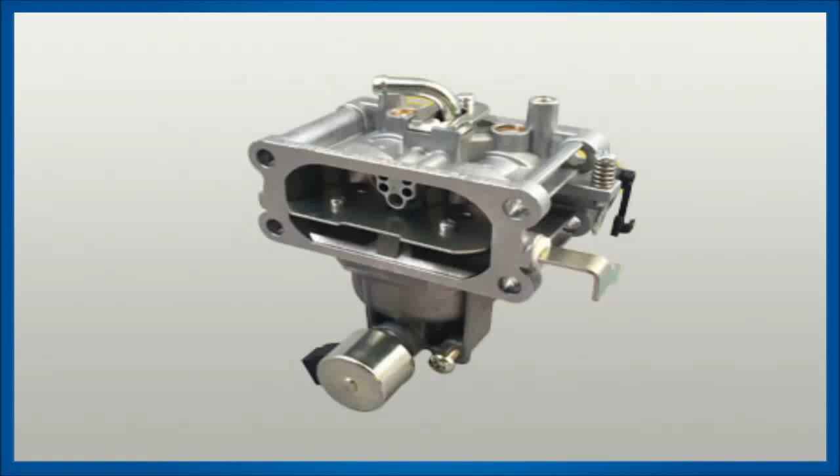Have you been looking for a way to service the Briggs & Stratton V-twin 2-barrel Nikki carburetor when the jet O-rings fail without having to buy new jets? Follow along and we'll show you how it's done with the new O-ring service kit that will save you time and money. At the end of this presentation, there'll be information on ordering the kit.

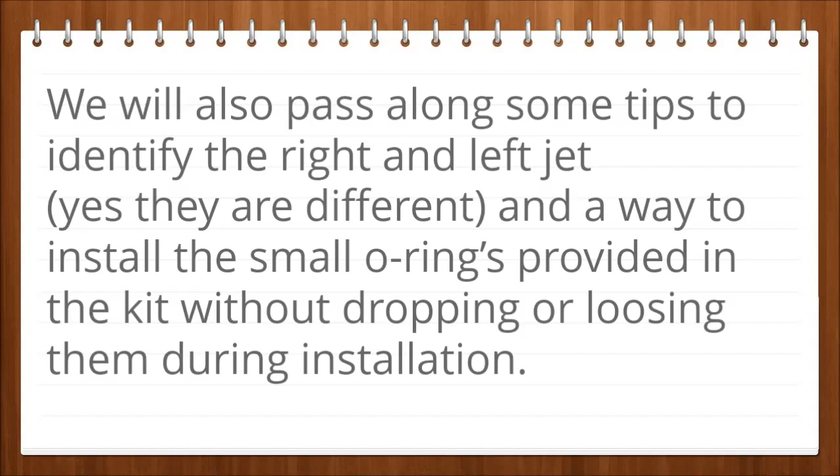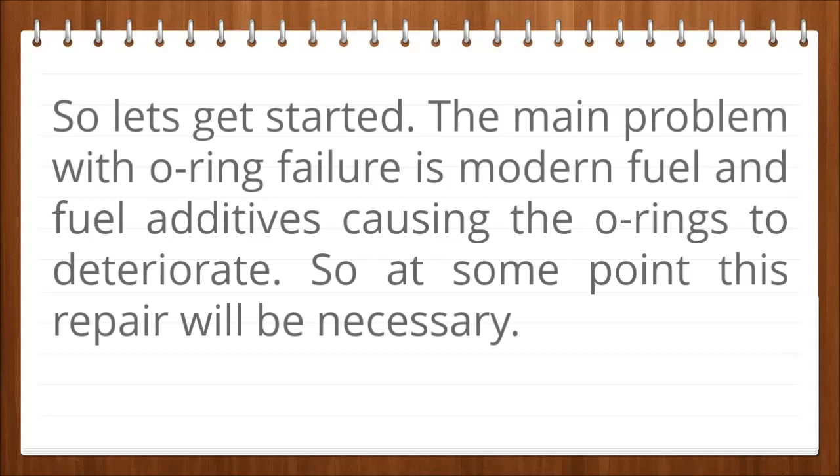We'll also pass along some tips to identify the right and left jet, yes, they are different, and a way to install the small O-rings provided in the kit without dropping or losing them during installation. So, let's get started. The main problem with O-ring failure is modern fuel and fuel additives, causing the O-rings to deteriorate. So at some point, this repair will be necessary.

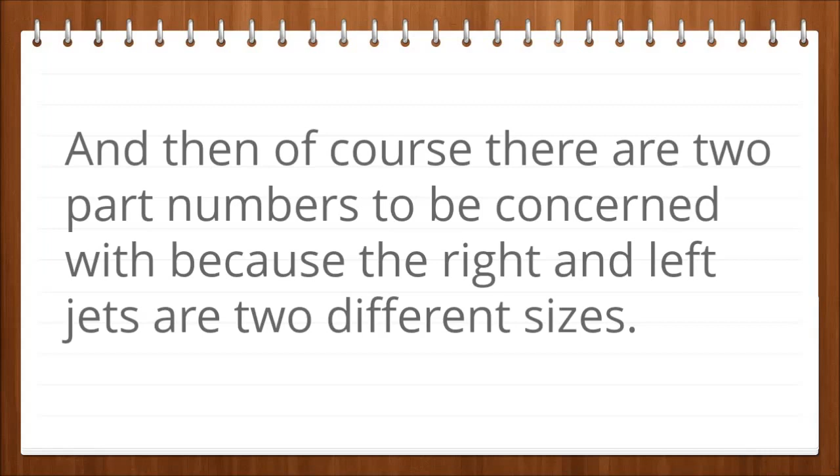Repairs are being done now by ordering new jets, which is costly and for the most part unnecessary. If you're a small engine shop, the correct jet may be out of stock from your main supplier, requiring you to order from more than one source, thus increasing turnaround time for you and the customer, and increasing job costs due to added shipping. And then, of course, there are two part numbers to be concerned with, because the right and left jets are two different sizes.

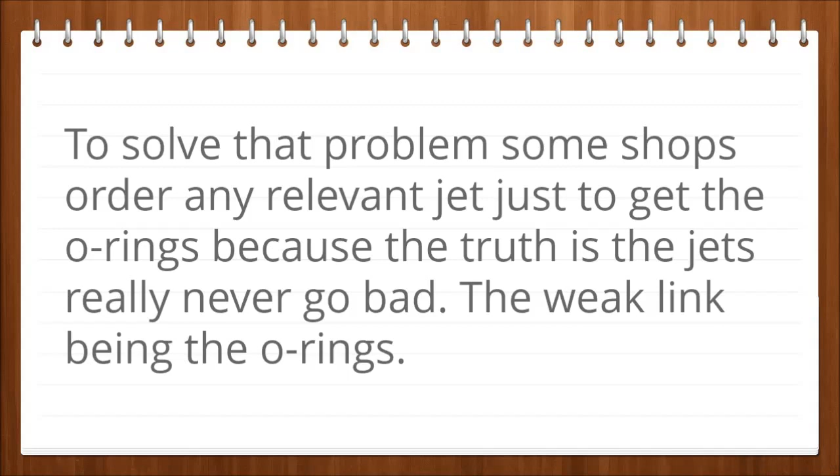To solve that problem, some shops order any relevant jet just to get the O-rings, because the truth is, the jets really never go bad, the weak link being the O-rings. At last, an O-ring service kit is available. It consists of 2 jet O-rings and a fuel bowl gasket, making this repair job a snap.

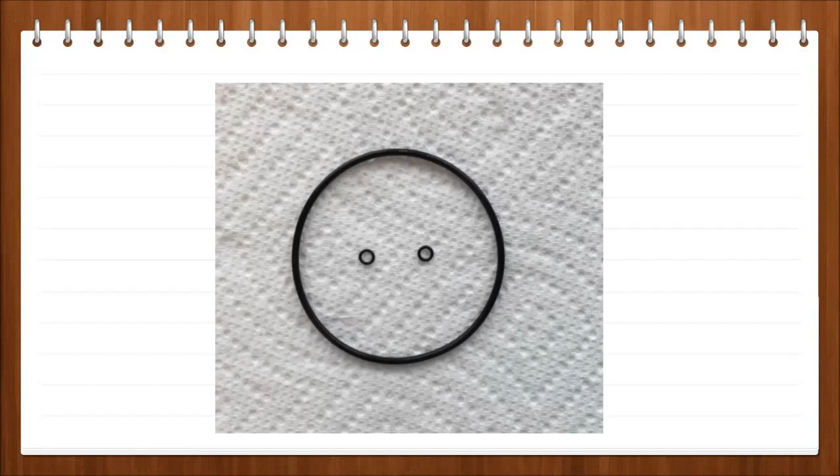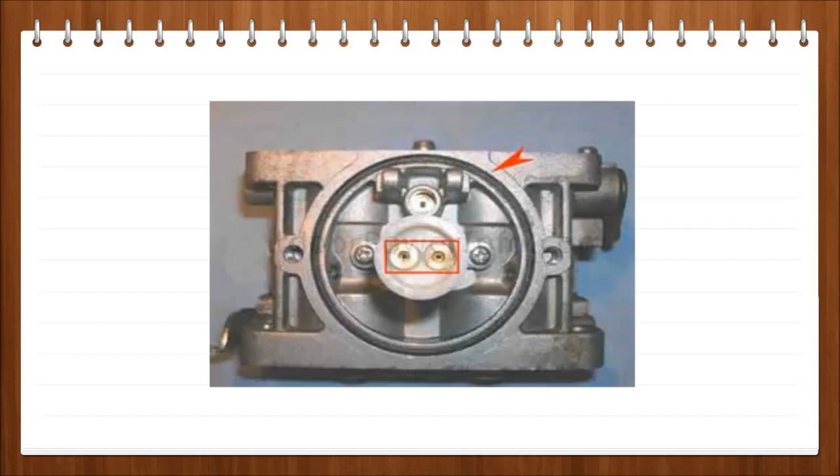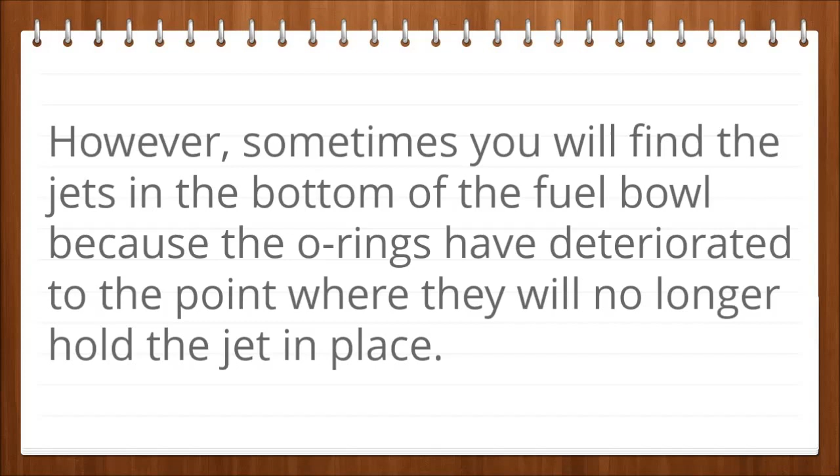Let's now take a short tour, look inside the carburetor. Looking at the photo, the red arrow points out the fuel bowl gasket and the red box shows where the jets are located. Our kit provides what you need to service these 2 areas. We recommend you service the jets one at a time so they go back in the same place. However, sometimes you'll find the jets in the bottom of the fuel bowl because the O-rings have deteriorated to the point where they'll no longer hold the jet in place.

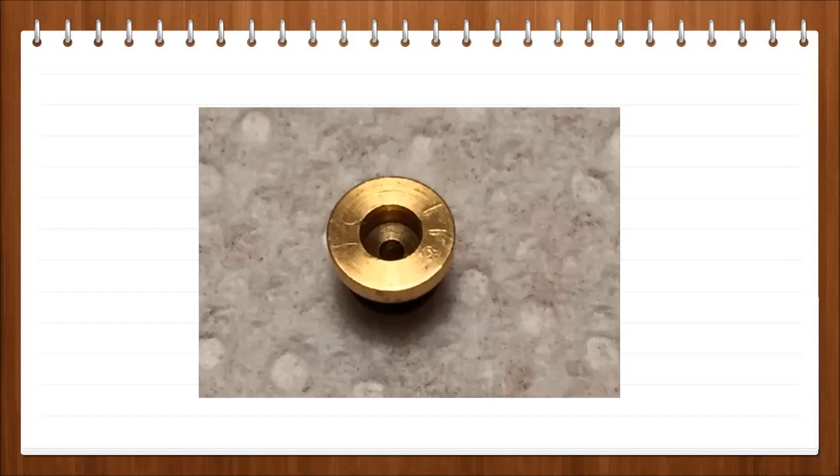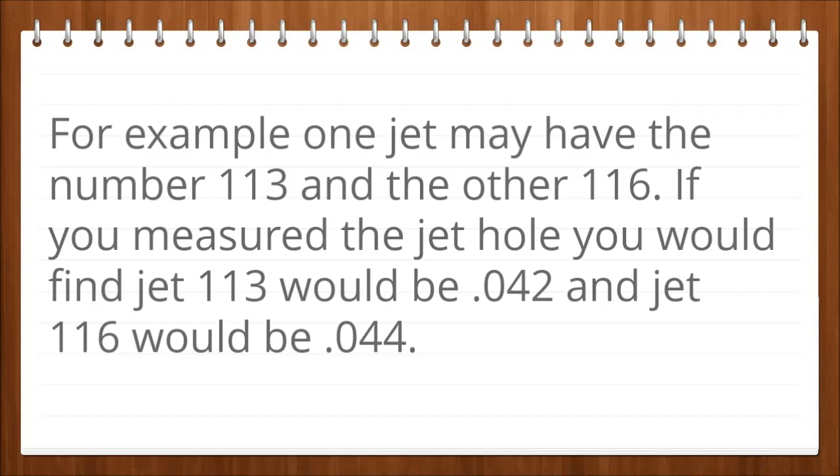And as mentioned, there is a right and left jet. So, where do they go back, and how do I determine the right and left side? Take a look at the jet. There are small numbers etched on them, but you'll probably need a magnifying glass to see them, and they may not be completely legible, but if you look at both of them, you will be able to make out that one number is larger than the other. For example, one jet may have the number 113 and the other 116. If you measured the jet hole, you would find jet 113 would be 0.042 and jet 116 would be 0.044.

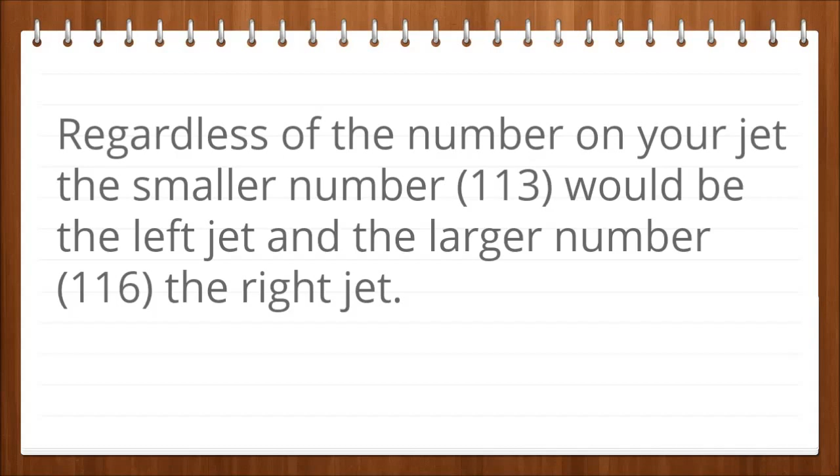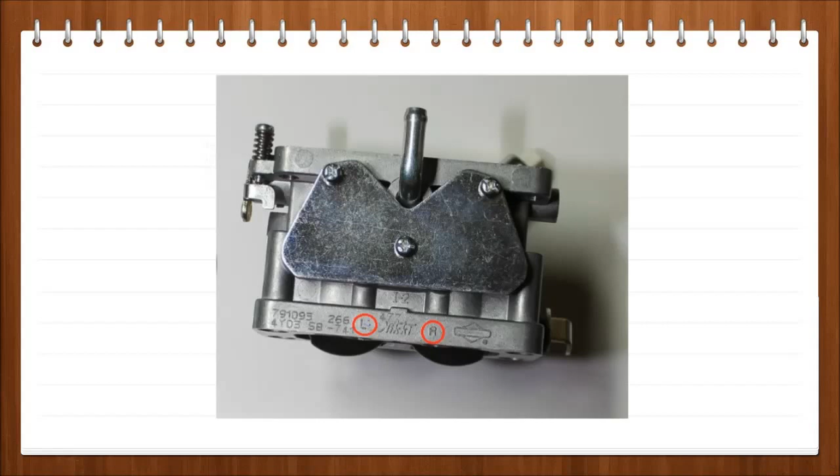As you can see, they're different, and for the engine to run properly, they must be put back in the right place. So here's how to do it. Regardless of the number on your jet, the smaller number, in our example, 113, would be the left jet, and the larger number, in our example, 116, would be the right jet. Now, the question is, how do I determine the right and left side of the carburetor? That's easy. Take a look at the front of the carburetor. You'll see it's stamped with the letter R and the letter L. Simply install the jets following the markings stamped on the carburetor.

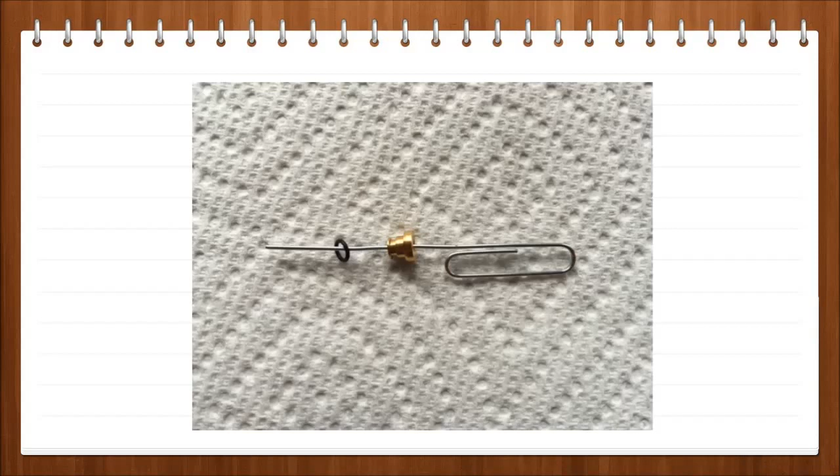Another common question we have been asked is, how can I install the O-rings without dropping them or losing them? Well, the following method works well for us. We straighten a lightweight paper clip. Make sure whatever you use that it's smaller than the jet hole so it won't damage the jet during O-ring installation. Slide the jet on the paper clip and then slide on the O-ring. Roll the O-ring over the jet groove with your fingers and you're ready to install the jet back into the fuel transfer tube.